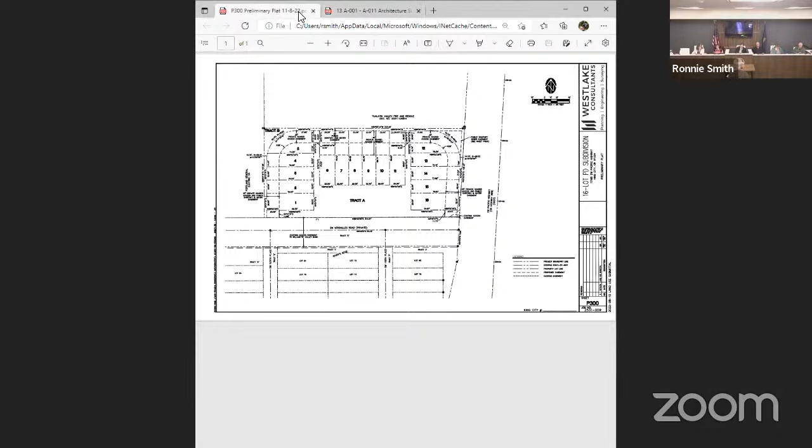The property's a little over an acre in size, and they're proposing 16 units. Ronnie's got the subdivision proposed plat up there. You can see they have the lots arranged in a horseshoe fashion with a private driveway easement going around the perimeter of the site. You can see where you've got a dash line for a driveway that would be two-way, intersecting with Versailles Road in 2 places.

Tract A is a proposed common open space. They have some space between the lots, the ones running north-south and the ones east-west, for pedestrian access, but you know, all of the units. I'll let the applicant provide some more detail there. Ronnie, if you could go to the next slide showing the proposed layout.

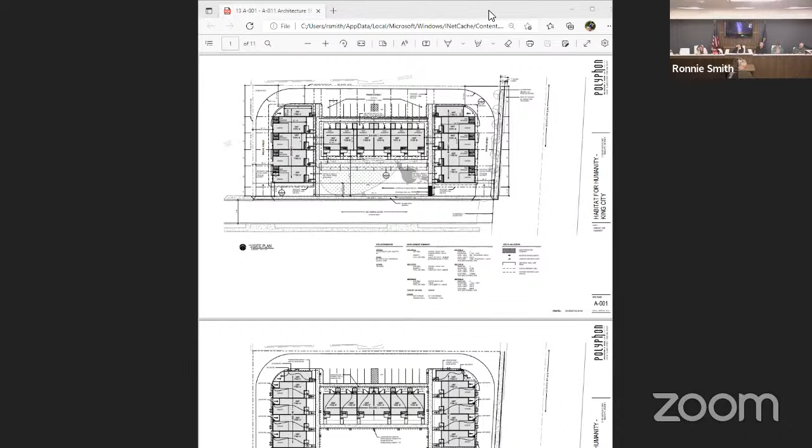The applicant proposes a 14,000-plus square foot common open space area. The variances, I'll get into in a little bit.

We got comments from, there we go, there's the layout. So you can see that we've got 5 units on each side going north-south, and then the remaining 6 east-west. The ones oriented east-west would only have surface parking available. The ones on the north-south side, the larger ones, would have a garage. And those 2 smaller units at the north end on each side would also have surface parking available.

We received a number of agency comments, provided either in the staff report or, in some cases, to the applicant ahead of time. They're in the application. The review agencies were comfortable with the proposal. ODOT recommended that a 6-foot wide sidewalk be provided along the 99W frontage on the east side.

Starting on page 6, I go through the proposal and make a comparison on how it stands up to the applicable requirements. As you can see, it meets most of those, and there are a number of variances that are required as we go through this. You will notice there are some places where the standards are not met.

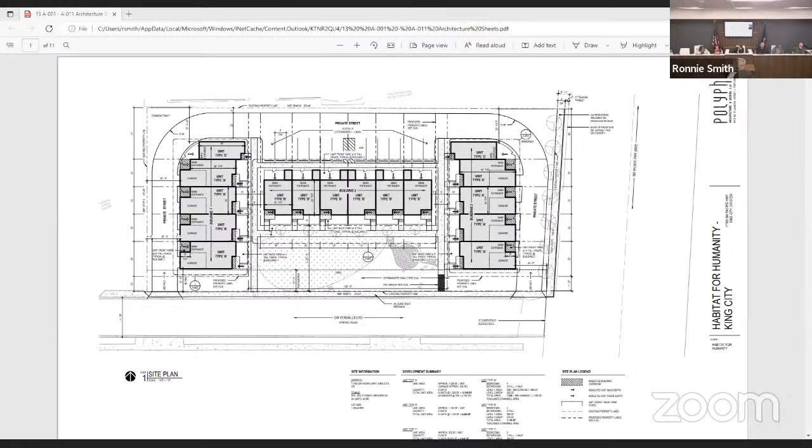Moving along to tree removal, they're requesting to remove 7 trees, mostly located along the perimeter of the site. But with the site being as tight as it is, trying to retain any trees is really very difficult, so we're recommending that those trees be removed.

When it comes to parking and loading, the city can only require 1 parking space per unit. There will be more than that, probably about 1.5 per unit. In addition, there will be parking available on Versailles Road. That street is currently set up to accommodate parallel parking on both sides, so they would have some on-street parking available also, probably shared with River's Edge.

Versailles Road is a private street, so they will be participating with the Homeowners Association for River's Edge on the maintenance of that street. The applicant can describe a little more what their agreement and understanding is with the Homeowners Association.

So I'll talk a little bit about the variance requests. They're requesting a 20-foot wide paved driveway instead of 24 feet, a 20-foot access easement where 30 feet is normally required, 17 square feet of front window glazing on the ground floor where 20 square feet is required, up to 6 attached units where a maximum of 4 is allowed, and lot coverage of up to 88% where a maximum of 75% is allowed. Let me go through those.

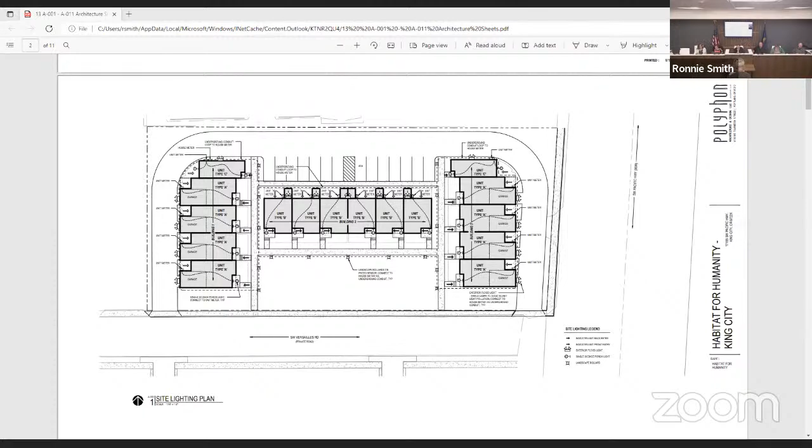So we're recommending approval of the subdivision planned development, and we have some conditions of approval starting on page 23. Most of those are fairly routine, just getting final approvals from ODOT and reviewing agencies. The city engineer will be involved, of course, in final plat and so on. I think I'll conclude there.

So if you have any other questions for me, otherwise we can turn it over to the applicant, and Ken Sandblast can give you some more detail about the project and then answer the questions you were posing before, and anything else you have.

For clarification from me, when it comes to lot coverage, you're talking about the individual lots per unit, right? So that's where it exceeds. I know that common area is about 31% of the total. So you're saying that's what balances out? In our view, yes. In your view? Okay.

Okay, thanks. Always the part that makes me the most nervous about these things is the technology. It used to be easier. Well, just have the paper plan ready.

Good morning, Keith and Planning Commission. I'm not sure this is Ken Sandblast. I say I'm unmuted, but I don't seem to have a video. So I can speak if you can hear me, just confirming you can hear me.

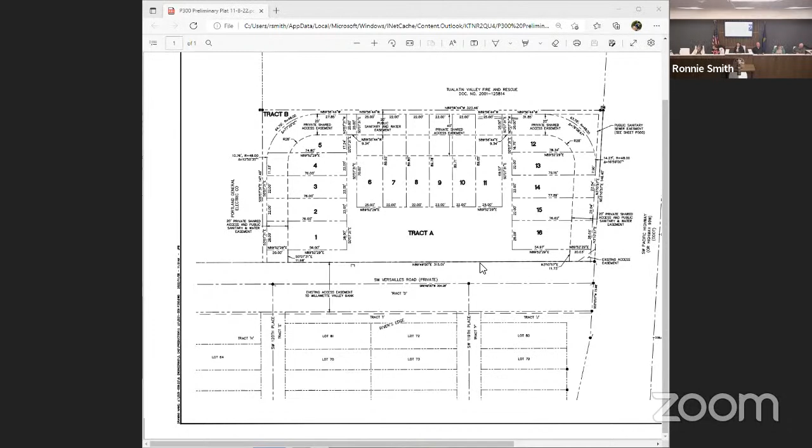So I'll see if I can take those one at a time. Putting some carport covers up above like 6 through 11, I think was maybe your thought on that. And that is definitely something that could be considered, because again, that's more of a final design kind of an issue, but it's definitely something that Habitat can consider putting in there. So that would be something that, I don't know, Ian, if you have anything to add on that, but that would be my initial thought.

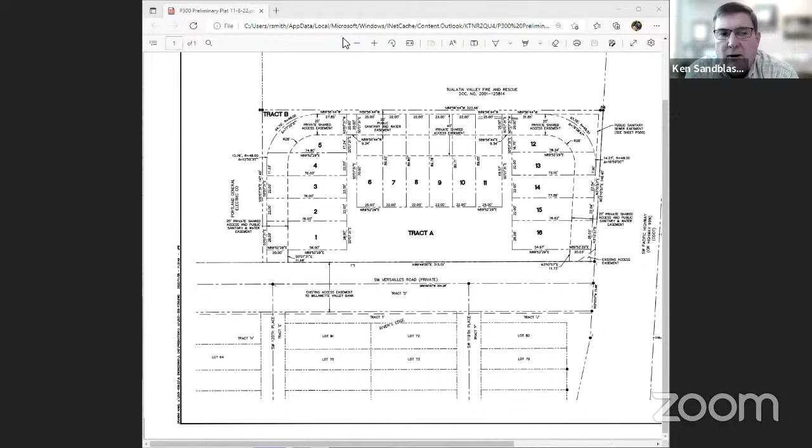And then the second one was ADA access, and the units are designed to have visitability. Use of the term ADA instantly brings into effect all the federal regulations and requirements that are involved with ADA that you see for corners of public streets and whatnot. Visitability is kind of a threshold that's a step below that, but it's basically the same thing.

It allows someone to get into this house without having to go up steps on at least one entrance into the house. And all of these units, in fact, all Habitat units that I'm aware of, are designed to provide visitability so that there will be access into the units without having to use at least one access in without having to use steps.

The street itself, I looked, again, just some more details. I looked at changing that radius, and I looked at using those corners for parking spaces. We looked at using them for the solid waste locations. We looked at using those extensively. We were looking at every space we could find.

The road curve that you see there at both corners of the property, at the northwest and the northeast, that radius is dictated by fire access requirements. So the 28-foot inside radius and the 48-foot outside radius of those curves are the minimums that we can provide and still satisfy Tualatin Valley Fire. So we can't make them shorter. I can't shrink up the curve.

And then, of course, if you look closely at our grading plan, we're doing grading in that upper corner because the site - overall it doesn't have a huge slope to it, but to get this all to work, especially with the visitability, that corner at the northwest corner, that's where we're doing a little bit of grading. So there'll be a grade change right there. The property will kind of be pushed down, if you will, in that upper left corner there.

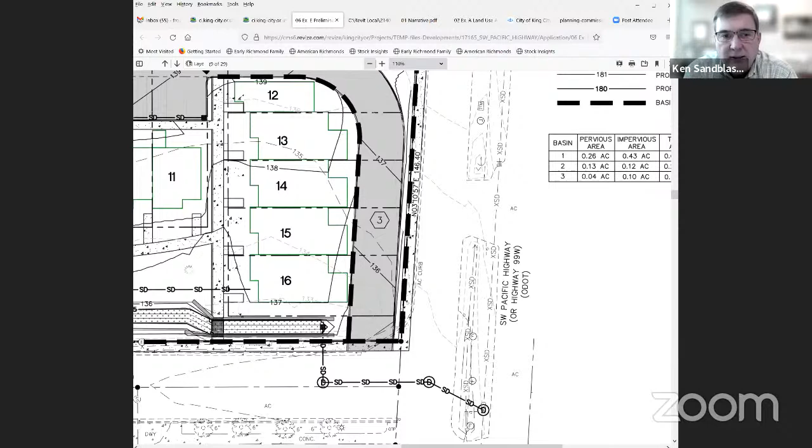So the idea of using pervious pavement to get water to go into the ground just won't be supported by the geology, and what I recall is in the geotech report. That was one of the issues that paused all of this when we were working on it several years ago, to make sure everybody fully understood what that meant. So the ability to do infiltration into the ground is not really an option here. We're doing treatment, and then that is being conveyed into the system that takes it into the existing ODOT system and out to the river. So we won't be doing any on-site infiltration. I think that knocked out the 4 things I remember.

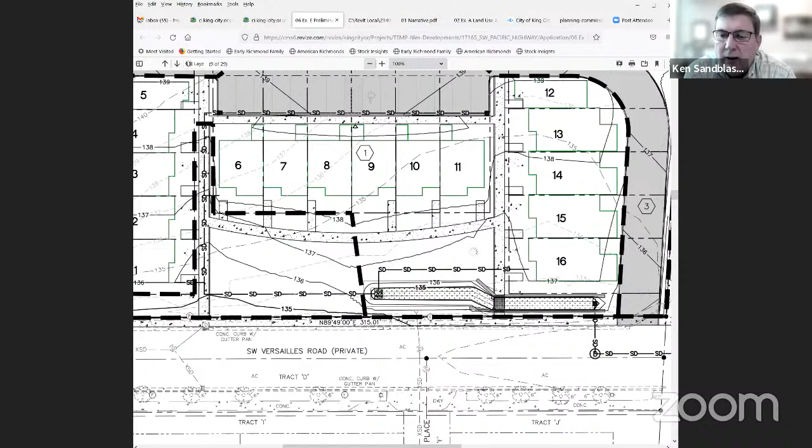And Ian, do you have anything you'd like to add on any of that, visibility or carport covers? Yeah, thanks for mentioning visibility. I should have added that to my spiel earlier. It's definitely something we've factored into the preliminary unit layouts for these homes.

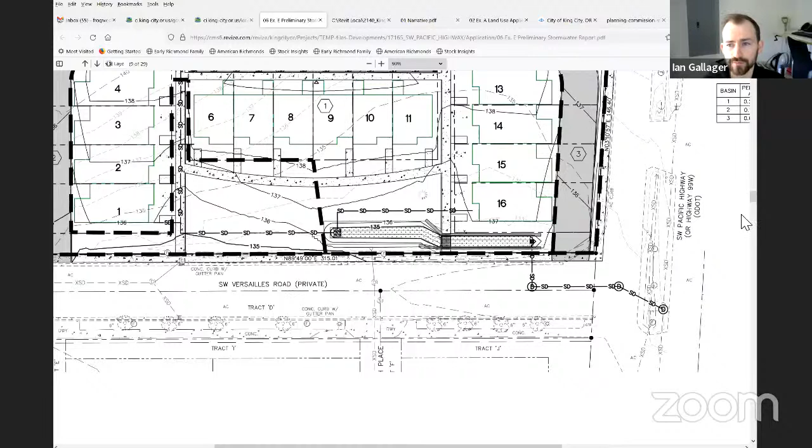We try to make all of our homes, or as many as possible, visitable, with a no-step entry, kitchen, bedroom, and bathroom all on the first floor if possible. We didn't manage that on all the units here. I think we got maybe 6, the middle units, where we managed to get a bedroom on the first floor.

So that's really great, because a common misconception about Habitat homes is that folks think of it as a starter home. But in reality, a lot of our families will move into this home and live there for the rest of their lives, with multi-generational living. So there's a lot of folks aging in place in Habitat homes, so it's super important that we design our homes that way. And it does really constrict us sometimes in how we design the site plan.

So we were able to get that parking there at the north, and a no-step entry into the north side of those homes, even though, like Ken said, there is a bit of slope to the site. It wouldn't have worked if we had oriented things differently. So yeah, thanks for bringing that up, Ken.

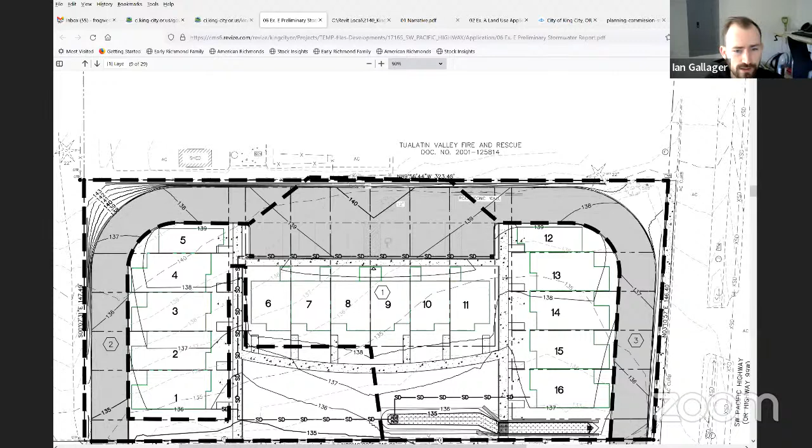As far as carports go, I've never seen a carport on a Habitat development. It's something we could explore. I'll jot it down and look into the costs of building and maintaining one. As with any builder, we're trying to figure out where to put our money to build the most and best affordable housing that we can. So if we put money toward a carport, it might mean not putting it somewhere else. That's something we'll need to look at and decide if it provides more value to these homeowners than another feature. Thanks for bringing that up, we'll take a look at it.

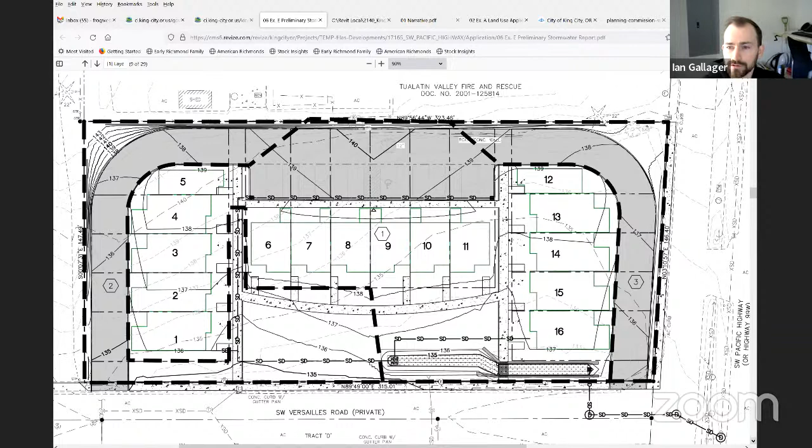Thank you. Are we talking about landscape yet? We have a landscape plan, if I heard you correctly, with landscapes around the perimeter and also through the open spaces and pedestrian access ways. So we have a preliminary plan that's part of our package.

I saw that, and I'd like to comment that I'd like to see some trees on the north side and also, especially on the west side. They will block, basically, the fire station, but mostly I'd really like to see some trees blocking the power station. It also will give some very needed shade to that west side.

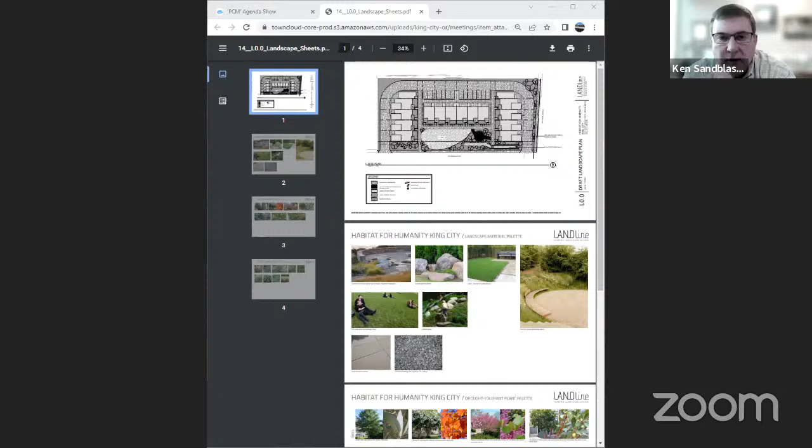Yeah, thank you for bringing that graphic up. Yes, I can see from what you're saying that the plan shows some tree planting along the east side, but we could definitely plant some on the west side. There'll be a slope right there in that upper west corner, so we'll just pick some trees that can fit given the grade going on there. But yeah, we can look at planting something along there as well.

The other thing that strikes me as an immediate thought is we have to pay attention to where the power lines are and what kind of trees we pick over there, because that substation is sitting there.

Question: will Habitat for Humanity be the HOA administrator at the end of the day, or does that get turned over to another company? How does that work? Yeah, it'll get turned over to another company.

That does make me think of one other thing I should share, which is that we've adopted a permanent affordability model with our homes. This is based on research from the last couple of decades around community land trust models, ensuring these homes stay affordable for generations to come. Habitat will own the land, which prevents it from appreciating at the same rate as other properties in the area. So homeowners will own their homes but have a set level of property value appreciation.

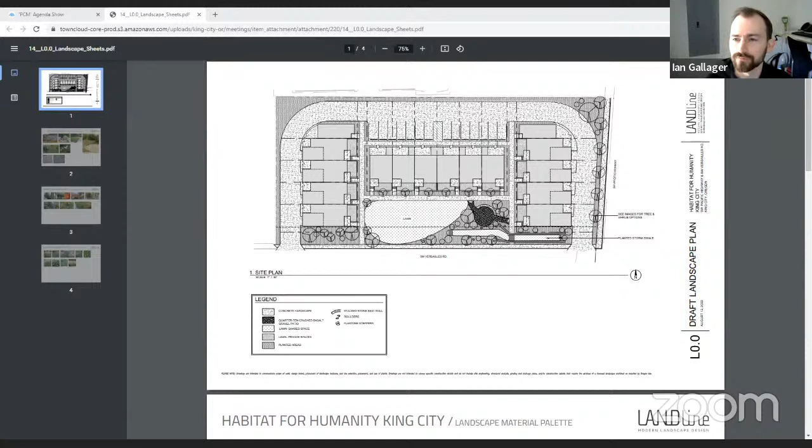Yeah, I can share about the accessibility question. As mentioned earlier, we do take that into account. We frequently do have folks with accessibility needs moving into our homes. So, looking at this site plan, you can see there is a path you could take to the Versailles Road, which would be an accessible pathway on that internal concrete sidewalk. And as far as getting into the homes, the 6 homes in the middle all have an accessible walkway from the parking right there into their home. And then the homes with garages, we've actually managed to maintain a slightly wider stairway to the 2nd floor, so if somebody were to move into one of those homes and want to retrofit it with some sort of accessible stair system, that would be available as well. So I think we've done a lot to make both the homes and the site plan friendly for folks with accessibility needs.

Well, the only thing I appreciate what you guys do as an organization, I think you're just exactly what we need right now. Well, thank you for saying that. Appreciate it.

And we definitely have been doing our best to grow our work. As I mentioned, there's probably about 1,000 Habitat for Humanities around the country, varying in size from 1 or 2 volunteers who do everything and maybe build a house every couple of years, to bigger affiliates like ourselves that are building 50 to 100 homes. We've grown a lot just in the 5 years that I've worked here. When I first got here 5 years ago, we had 1 project going with 15 homes. Now we've got 4 projects around the region. We had 100 homes under construction at one point this year. So we are seeing the need and we are trying to scale our efforts to help meet the need around the region. And it's exciting to be working in new jurisdictions like King City, and we're looking for opportunities and parcels of land anywhere we can to continue to scale the work.

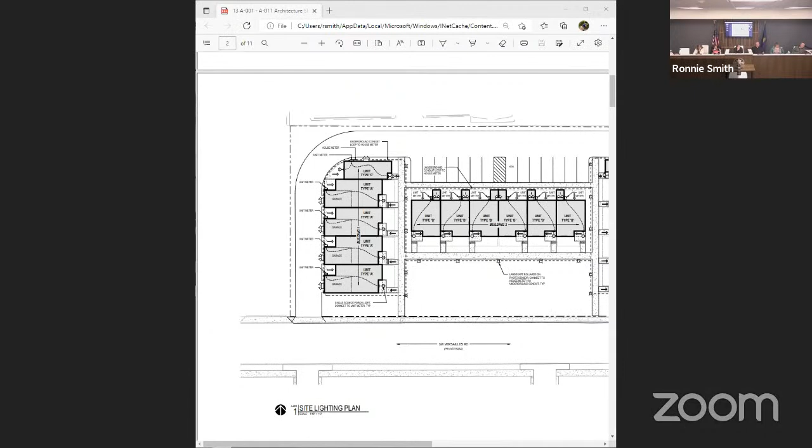And the answer to that is no, because there's 4 extra spots. Right, but what he's saying is those extra spots would be assigned to the units, right? But somebody's gonna get left out. So units 5 through 12 would get assigned 1 spot, right? Either getting 2 or having 1. And then there'd be a couple open spots.

So there's gonna be 4, oh right? Yeah, sure. I was thinking the C and D units also share street parking, one spot, yeah, but I mean just for ease of access to the home that they own. I have a question for the chair.

So our position here today—I'm new to this, this is my first land review—our function here today is basically to look at the variances, is that correct? It's not design review or anything. I mean, it's great that we're asking questions, because we do have questions about what's going on in our community. Our basic function here is to look at the variances and decide whether or not to approve or disapprove, is that correct?

The subdivision and the variance. Yeah, there's some design elements where the code has no particular authority to require one thing over another. So for example, we can talk about parking—the present day you have 2 per unit. We can only require 1, you know.

CDC, right? Does that dictate parking? Community development code only requires 1 per unit? No, per Metro. No, per state, Metro also.

State, Metro. Okay, so each unit is guaranteed 1 spot, but the homeowner, once they purchase it, they're not gonna be guaranteed a spot—it's still first come, first served. Well, if I understand correctly, the units that do not have a garage will have a designated surface spot. Okay, so you would have some that would be designated, and then the remainder would be whoever uses it.

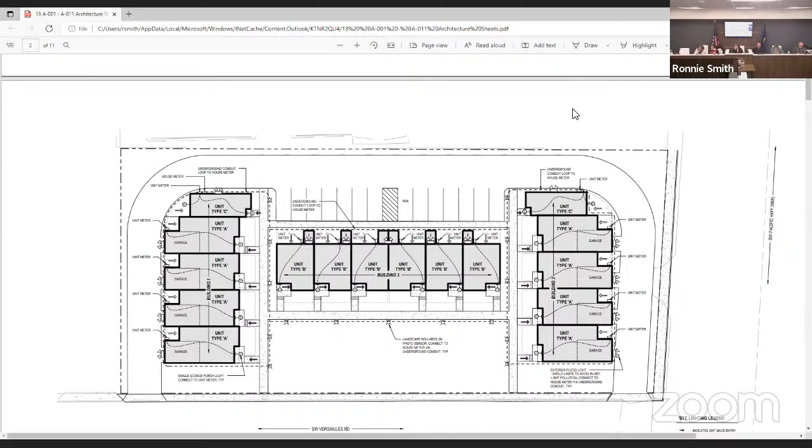Yeah, I appreciate that comment, because one of the threads I liked about this was the connectivity of the pedestrian ways, so that all of the units could walk out and get to that space. And that idea, Keith touched on it during his comments about the variances. Typically it would be wider because you'd have that access for pedestrians, but we provided it internally, and it just resulted in more functionality for pedestrian access to get to that open space. So again, it's been quite the journey to get here, and there's a lot of positives about all of this. Of course there's some code-related things that are the resulting couple of variances about the design of it, but overall, I've been happy with how it evolved.

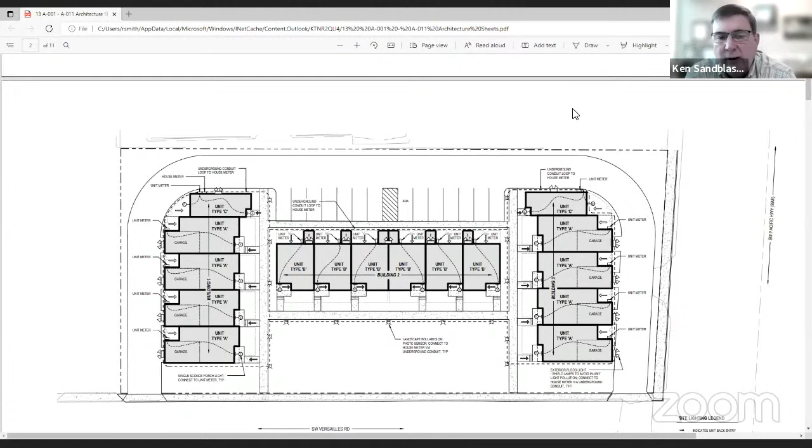I'm going to make another suggestion. I've been a site designer. The inside corners of the park space, you're going to want to curve those, because people will cut those corners and create big mud holes.

Do you mean the upper right and the upper left, or do you mean down at the bottoms where you come off of Versailles? The upper right and left. Yeah, those are the ones I was just talking about a minute ago, that they are the minimum requirements for a fire truck. So when cars navigate that, the car's turning radius and requirements are less than a fire truck's. So those radiuses... Okay, sorry, I may have misunderstood you. Yeah, it's up the park, in front of Unit B, front of... no, let's see, I don't have the numbers here. But it's just around the park, you know, how people follow goat paths, and they don't turn at right angles when they're on the sidewalk. It's the sidewalk I'm talking about.

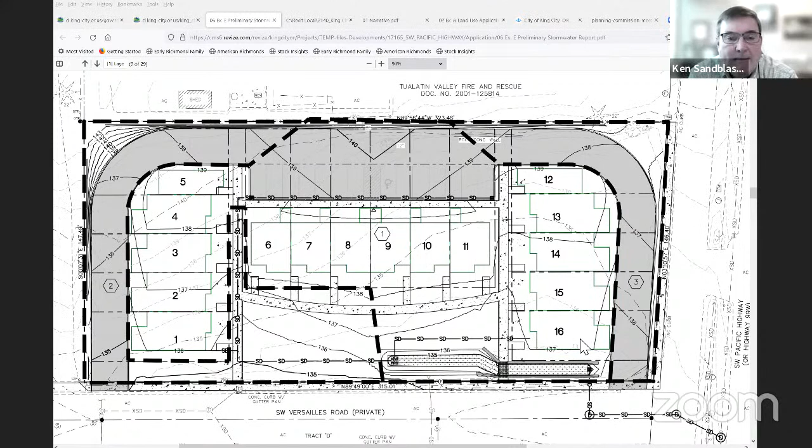Going forward, does anyone wish to provide neutral comment? Does any member of the audience wish to speak in favor of this application?

Please state your name and address for the record. I'm Margie Farwell at 16285 Southwest King Charles Avenue. I just want to speak in favor of the people who will be living in this area. Because these people, you know, some people might think they're poor, but they're not lesser than the quality of the rest of our town. These are hardworking, community-minded, fantastic people, every one of them that I have met. So I'm 100% in favor of having that in our town. Thank you.

Does any member of the audience wish to speak in opposition of this application? May I approach?